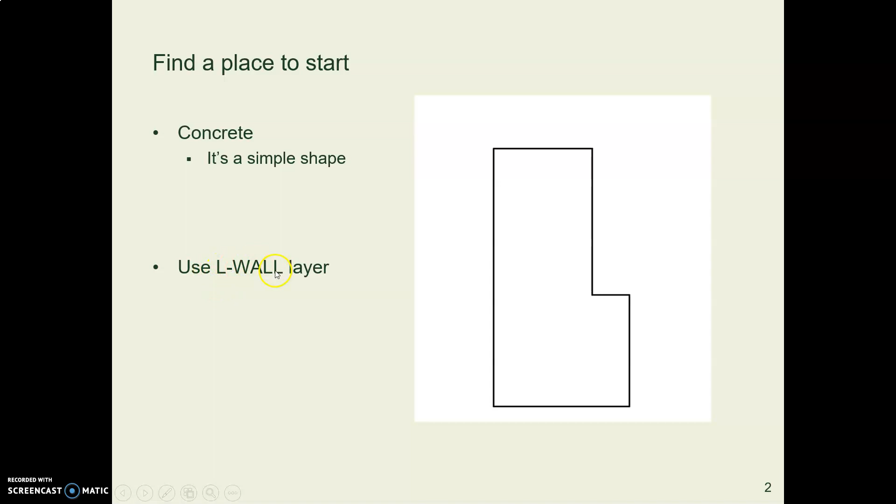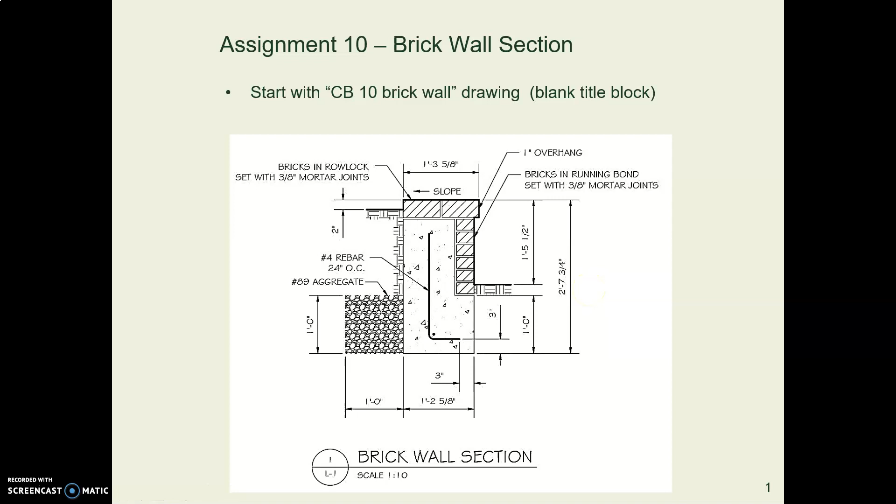And we have a layer. It's L for landscape. I could have used C for civil, but I used L. So we'll use the layer L-wall, and we'll draw that L-shaped thing. And you have enough dimensions here that you could draw that thing. At least you could draw part of it. Let's think about some more, because the bricks are going to give us some sizes too.

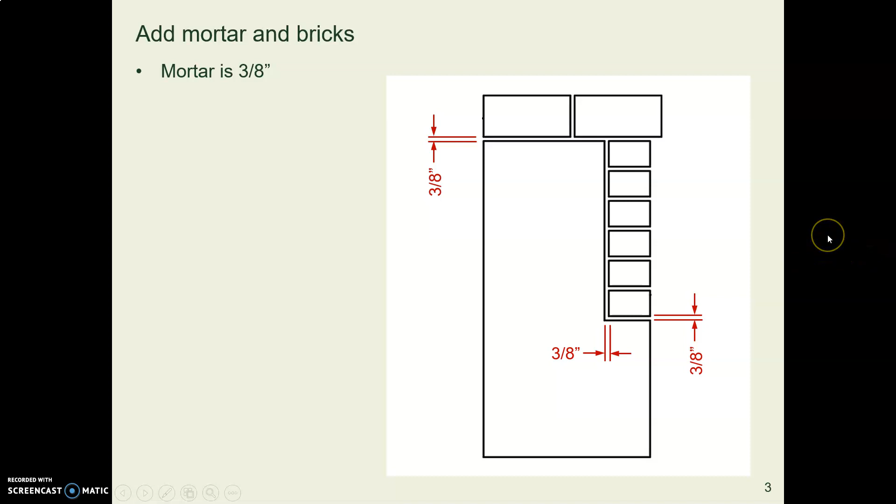Now in this wall, we're using a standard 3/8 thick mortar. You know, that concrete-like stuff made out of cement that goes in between the bricks. So anyway, the mortar is 3/8 of an inch thick. And the way these bricks are, they are sized so that you have a module that's 4 by 8 when you've got the mortar in there. If they made just the brick by itself 4 by 8, then tolerances would accumulate and it would be hard to figure things out.

So they're set up so that with a 3/8 mortar joint, these bricks will wind up being 8 inches long with mortar, 4 inches thick with mortar, and 2 5/8 wide with mortar. Well, you'll notice we got two different sizes of bricks going on here in this drawing, so what's that about?

What that is about is, when you think about a brick, notice that it's got 3 different dimensions. There's the length, which will be 8 inches once you get mortar in there. It's got a longer width that will be 4 inches when you get mortar in there, and it's got a thickness which will be 2 5/8 when you get mortar in there.

And in this wall, they have turned these bricks up on edge, so we're seeing the 4 by 8 face of this thing on the top. These are on edge. Then on the face of the wall, they have turned them so that we're looking at the smaller end view of the brick. These are all the same bricks, they're just turned different directions.

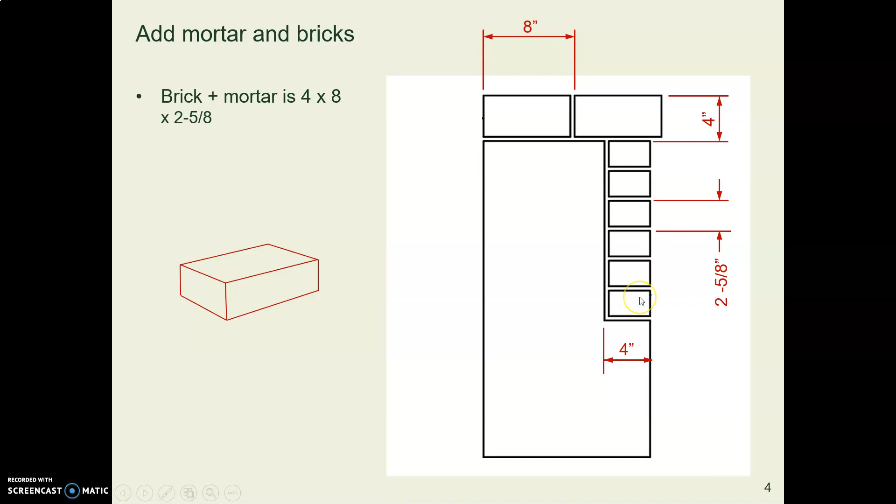So if I put numbers at the bottom of this slide, if you wanted to think about how big are the bricks without the mortar, 8 inches minus 3/8, the length is 7 5/8, 4 inches minus 3/8, the height is 3 5/8, and 2 5/8 minus 3/8, the thickness is 2 1/4, if you prefer that.

So here is one of the thinking exercises in this drawing. How do you get from those sizes that you know to everybody being in here in the right place? And I would suggest that the 2 commands that will probably work the best are offset, maybe just offset, or maybe offset and copy. You might draw one brick and then offset and then copy.

One thing about college that we all learn the hard way is that nobody teaches you anything really. It's you getting in there and wrestling with a thing that you're learning about that winds up doing the learning. And that took me a long time to learn. I thought I would just give the college some money, they would give me a degree, and they would pour stuff into my brain and it would be full. And it turned out, no, it's not that.

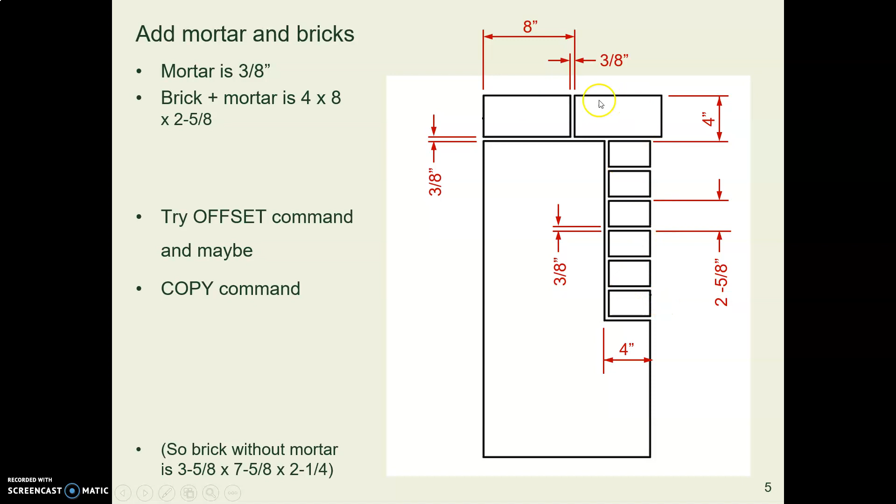So I just want to say, go forth and give it a try. I know it's going to be challenging and maybe even frustrating, and you'll say, why don't you just tell me what to do? And the answer is because your designer brain cells are going to get stronger if you get in here and wrestle with these stupid bricks.

All right. In the middle of the concrete wall, there's a piece of rebar. Rebar is short for reinforcing bar. That's that textured round steel bar that you see in the middle of concrete foundations and walls. And I've given you a layer. It's L-RBAR. That gives you a thick line. So you can draw this L-shaped thing on the L-RBAR layer.

They tell you that the rebar has to be at least 3 inches in from each edge. It can be farther, but it has to be at least that far. And that's so you don't get cracks in the concrete and water seeping in, and then the rebar rusts, and then the wall disintegrates and the building falls down. So we have to keep that distance. I think they don't tell you that it's 3 inches from the top. You could make it that height if you wanted to.

They do not tell you what the radius is on here. You could try a fillet radius of 1/2 inch and see how you like that. Maybe some of you who have worked in rebar know what a standard radius is, and if so, please tell us in one of our forums.

Now, there's also an end view of a piece of rebar here in this bend, and this is number 4 rebar. And down here at the bottom of the slide, you see here's how the stuff is sized. Number 4 means the diameter is 4/8, so it's 1/2 inch. So that's a 1/2 inch circle there.

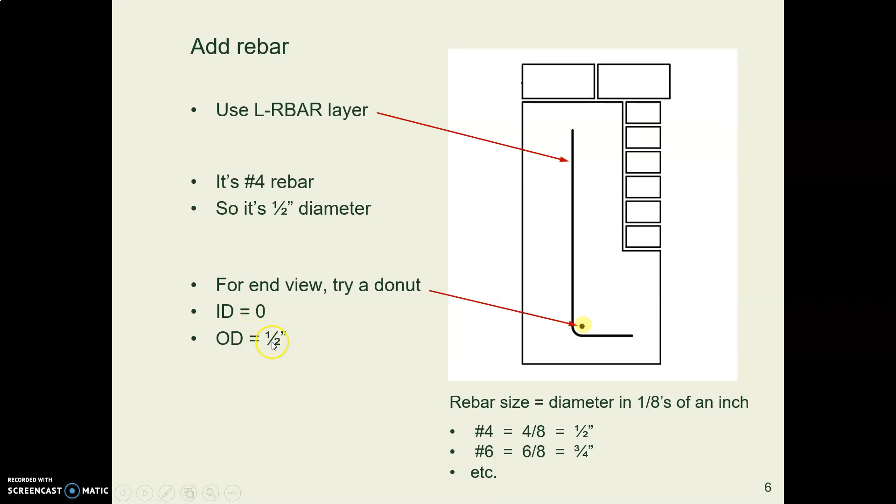May I suggest you try a donut command in AutoCAD? You used a donut with the Recreation Center, I believe. So you could set the inside diameter at 0 and the outside diameter at 1/2 inch, and that will give you a good donut.

Then use the hatch layer for all these patterns. And I think they don't give you a dimension for this hatch pattern. You just kind of make it the thickness you would like. The hatch should match the drawing scale factor, but it doesn't, and I have not figured out why. These are the scales I used for my hatch, and it looks like this. So you could try those scales if you like. You might prefer a different hatch scale. If so, go for it. It's fine. And let me know if you figure anything out about the hatch.

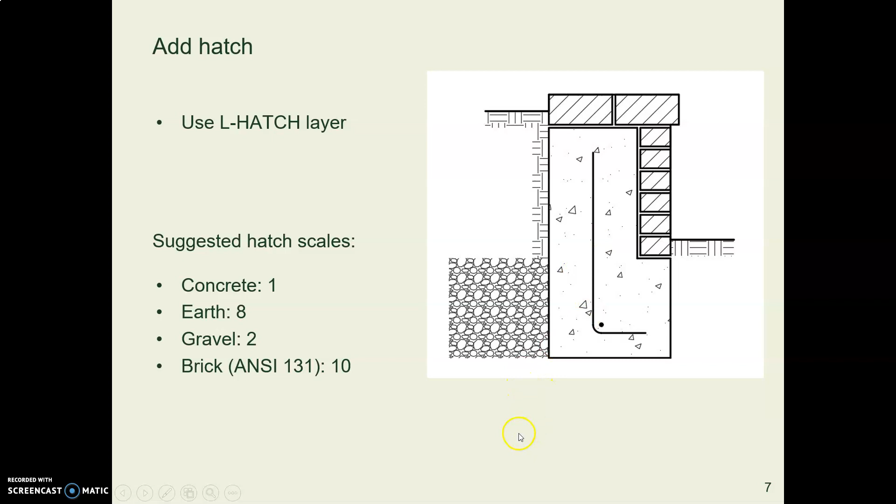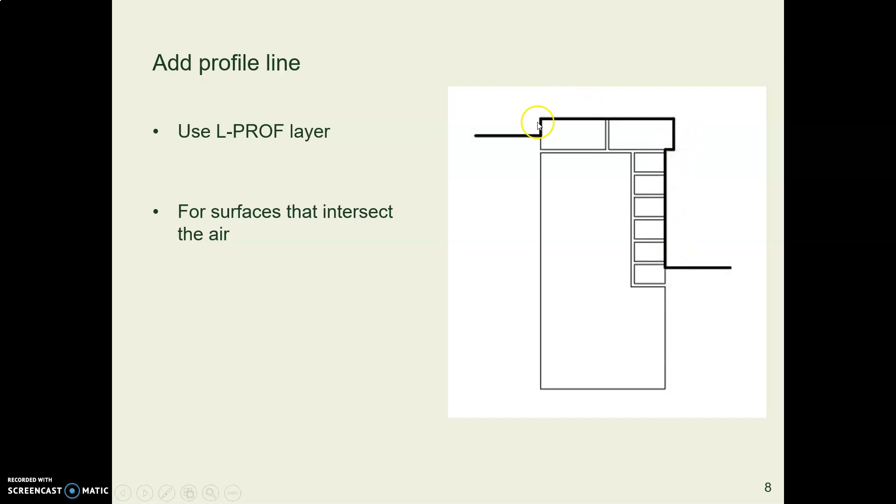Now let's go look at our drawing briefly. Oh, I forgot to say one more thing. I gave you a layer called L-profile, L-prof, which is a thick line. That's a profile line, and a profile line is an extra thick line that you draw around the outside of the thing where these surfaces intersect the air, and it gives it a nice finished look. So do that with your profile layer.

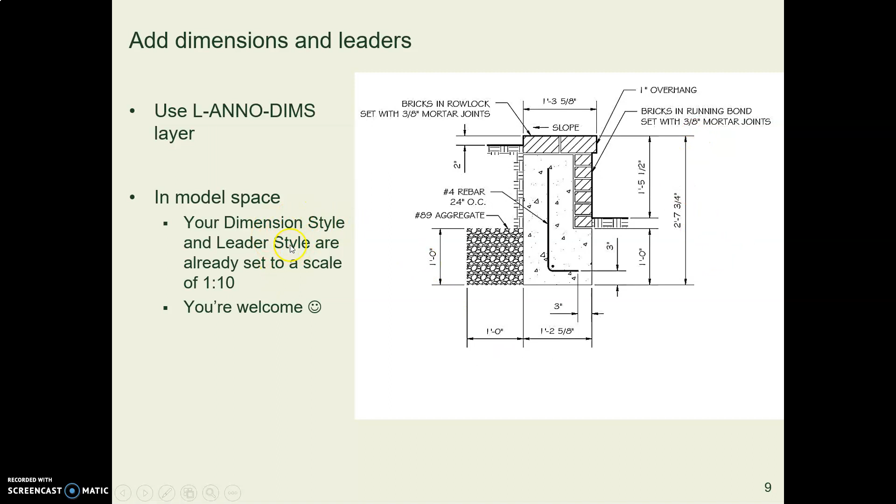And then add leaders and dimensions. I've already set the dimension style and the leader style to the right scale, so you won't have to fool with that.

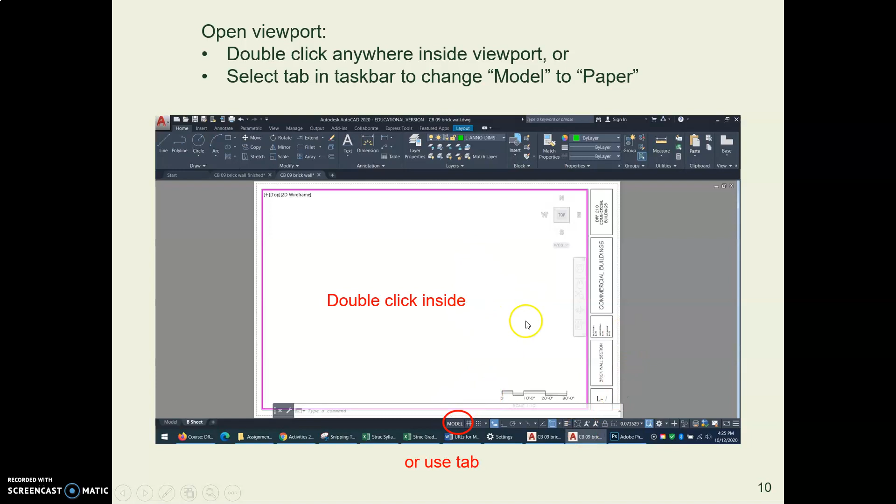And now I'm going to go over to AutoCAD and show you this. We're going to open our viewport, or click Model Space, and we're going to get our brick wall located in here.

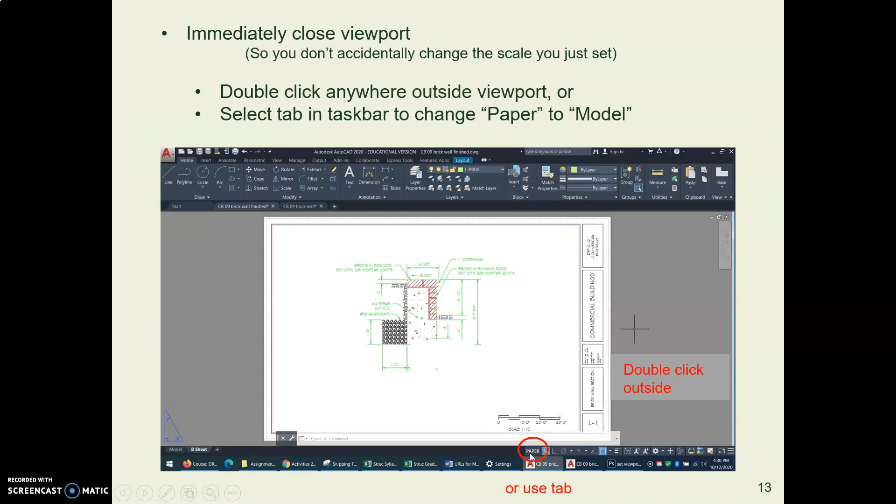Then we'll set our viewport scale, and our scale for this drawing will be 1 to 10. Notice that's an engineering unit. Then we'll make sure we close our viewport immediately so we don't accidentally screw anything up.

And we'll add this title stuff to the paper space. Now you could add the title stuff in model space, but you'd have to do some calculation to figure out what height to make the text so it would scale properly. It's really much easier just to do it in paper space to begin with.

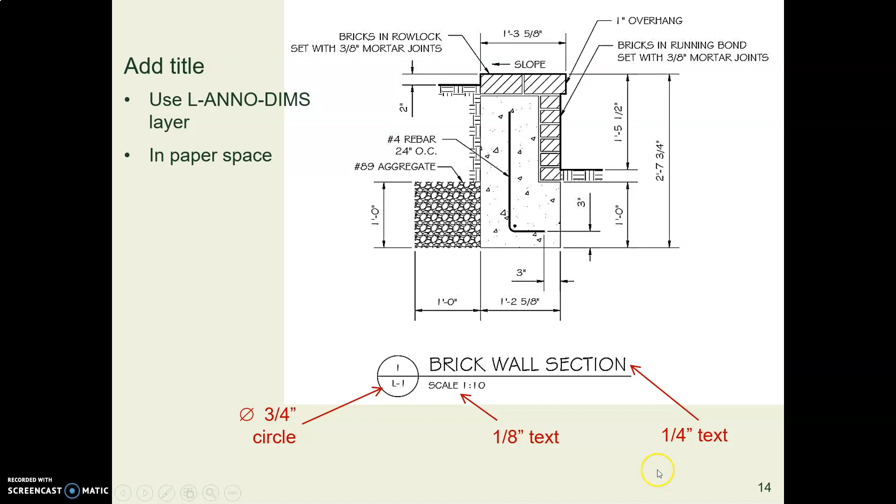Make a 3/4 inch circle, make the title a 1/4 inch high, make the stuff in the bubble and the scale an 1/8 inch high, and it will look good. Oh, and use the dimension layer. And make sure you put your name in the title block.

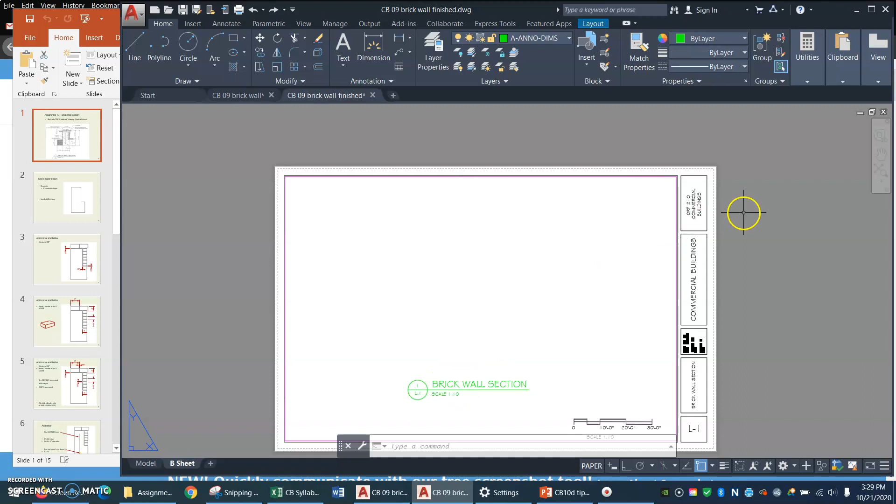So now let's look at the title block that I've given you. So when you open it, it will look like this, except you won't have a title on it. I've already put one on there. And you'll notice that I've given you a whole different set of layers.

You've got annotation layers for dimensioning and so forth. And you've got some landscape layers that we looked at earlier. And I've already set the line weights for you.

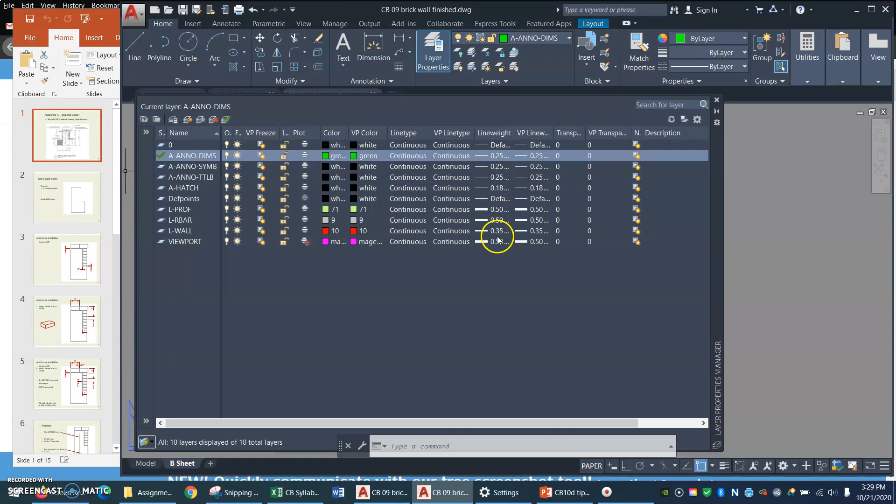So I've already drawn my wall. Let me zoom a little bit there. I've already drawn my wall, but I don't see my wall, so I need to get it into my paper space somehow. So I'm in the Layout tab here, the B sheet thing.

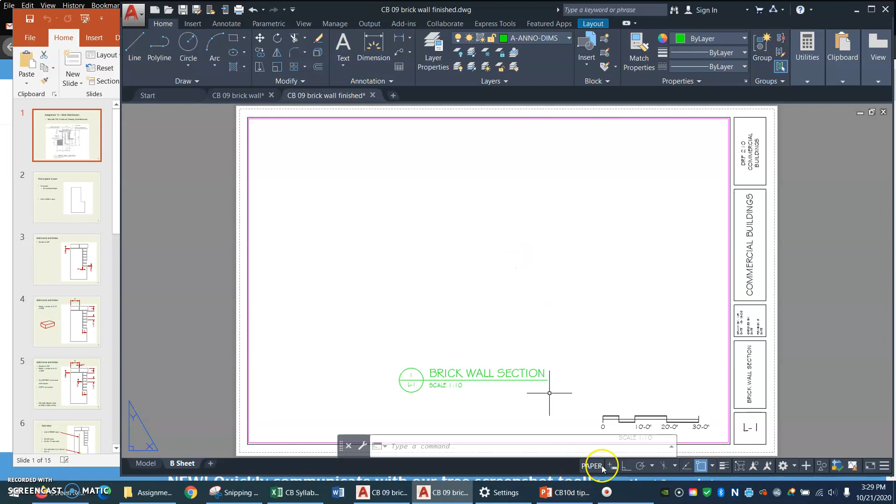I'm going to double click inside. Now watch what happens to this Paper tab when I double click inside. Look at that, it changed to model space and some other stuff showed up. And my viewport frame has gotten thick. So that means I have opened my window, my viewport, into model space, and now I'm in model space.

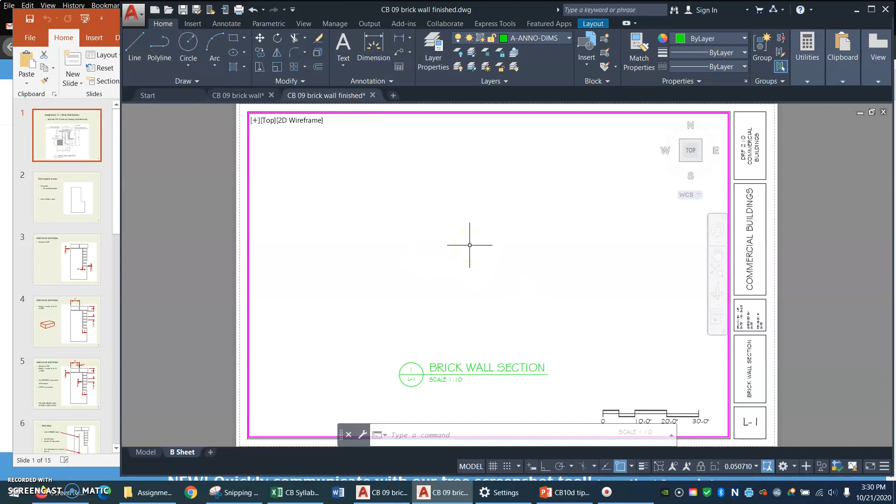But where is my drawing? Well, I could pan and, you know, oh, look, there it is. What I like to do is I like to type Z for zoom.

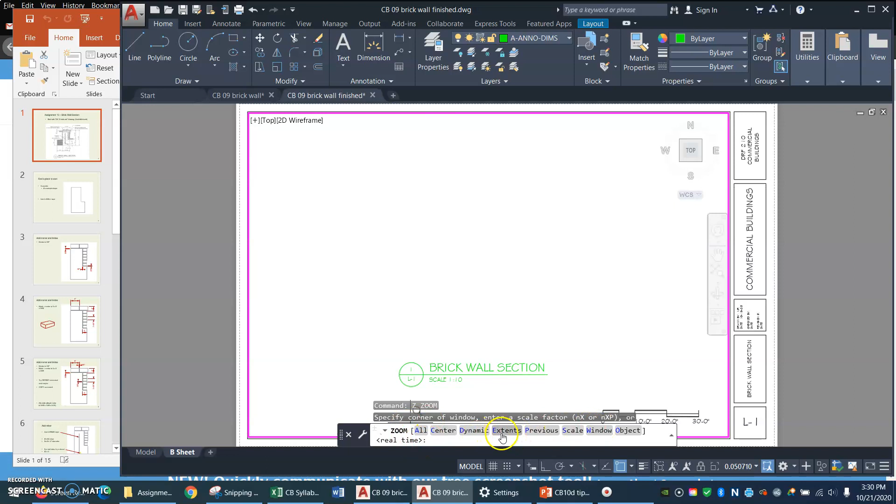And notice all these options. I then type E for extents, and extents brings you to the full extents of whatever you drew. So that's a good way to find your drawing. But that's not the right scale.

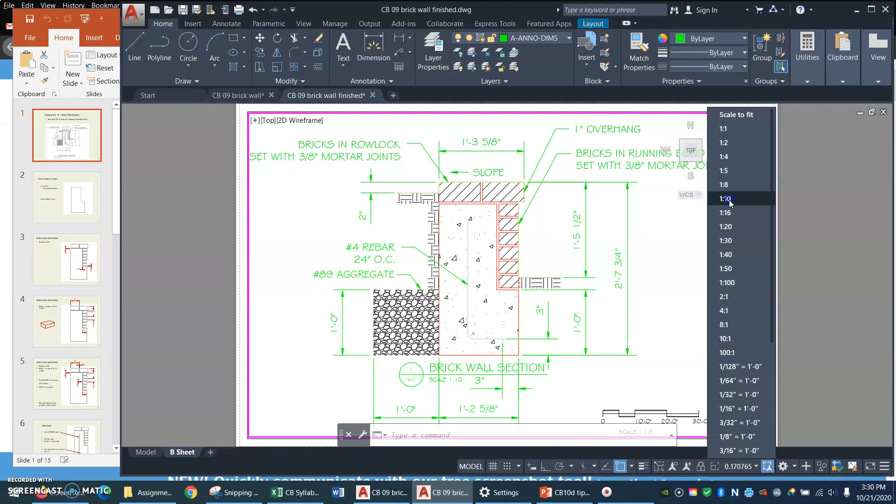So now I'm going to come down here to this drop-up list, and I'm going to select my scale, and for this drawing it will be 1 to 10. There we go. And if I need to, I will then pan a little bit to get it wherever I want it.

And now the very next thing I do before I touch anything else is I'm going to close my viewport. And I could do that by clicking this tab, or I could double click outside, which is what I usually do.

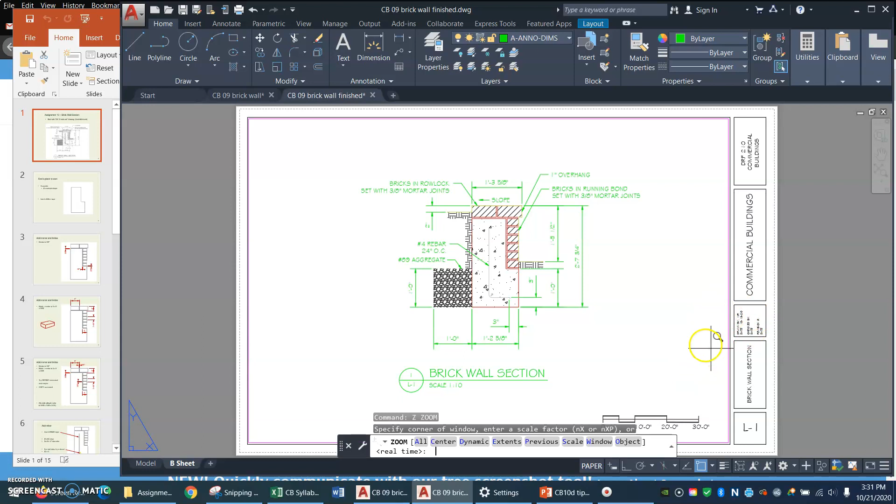I have already set up the graphic scale for you here to the right numbers. Make sure you come over here to the title block thing. I'll zoom in. I've got my name in there, so you want to change it to your name.

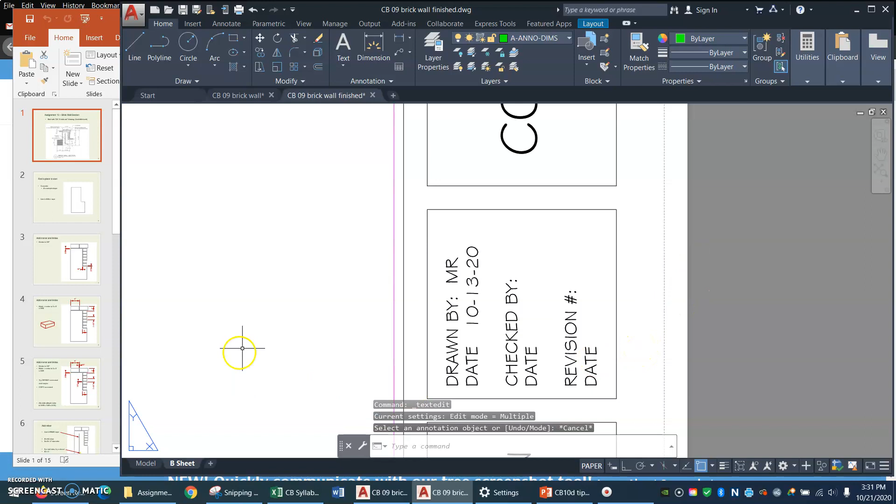And you can do that by double clicking, which opens the text editor, or you can type ED for edit, which also opens the editor. And then here in paper space, here is my title that I drew in paper space.

And to make this circle, let me make another circle just to be cool. So I made a circle.

I'm going to type C, enter, but you could come up here, C, enter. And I'll click it somewhere. What radius? I'm going to go D for diameter, and I'm going to go 3/4. There's my circle. Now, hopefully, you have a quadrant

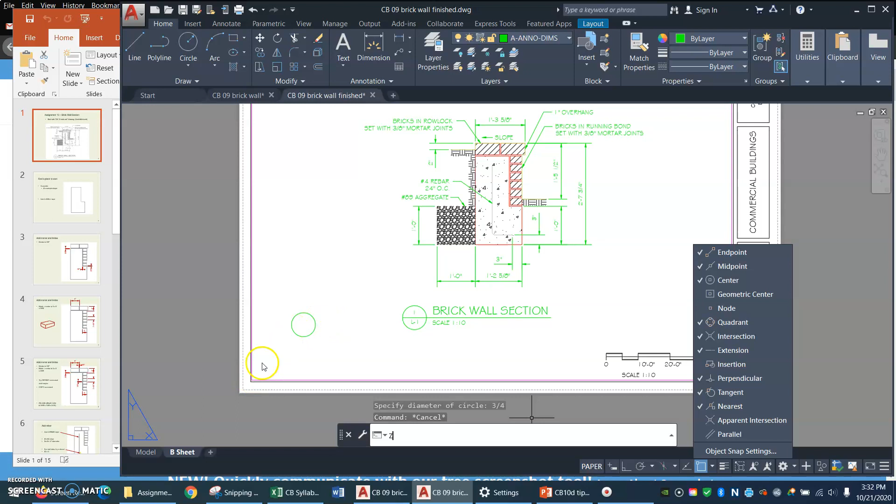O-snap, and if you do, then when you come in to make your line here, you can go line, and snap to that quadrant, and now it's easy.